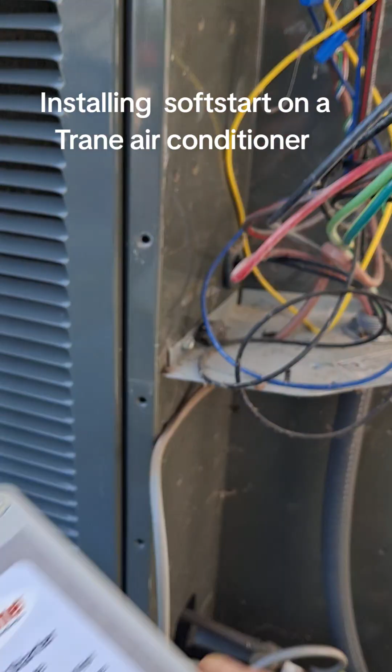So I want to put a soft start on this air conditioner here. I have decided the electrical compartment is big enough to house it. Now the question is, do I want to put it like this or like this? It just depends on what I want to do.

Now, I have that sticky part there. I can just stick it, but anybody that knows anything about sticky stuff being outside in the weather knows that it may not be reliable and it can just go possibly over time. So we're going to also utilize some of the screws it came with.

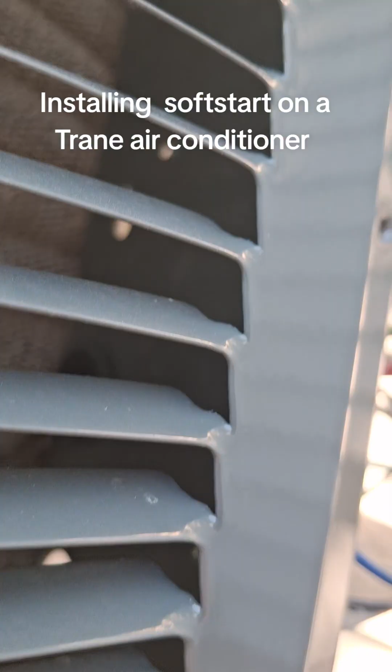But before we start putting screws here or screws here, we're going to stop and take a look inside the cabinet here. Your air conditioner might vary, but we want to make sure before you put screws there are no refrigerant lines or any wires or anything that's in the way. So I don't see any refrigerant lines.

I mean, see the little copper pipes there? Those are going to be refrigerant lines. If you have any of those that are going to be potentially in the way of a screw or rub or touch or something, not a good spot for it. Unless you're competent enough to make sure, if you have a 1-inch space, you don't want to use a 2-inch screw, because you're going to cause problems that will release all the refrigerant, and it's going to be a very costly repair.

So that side looks pretty clear. Let's see what we can see over here. Oh, we see some wires. Okay, so I'm going to do that just to be on the best bet, because it'll be a very big pain to put a screw in a wire. Then you have to do a repair, and it's just going to make the job harder, and we don't want to do that because I'm lazy.

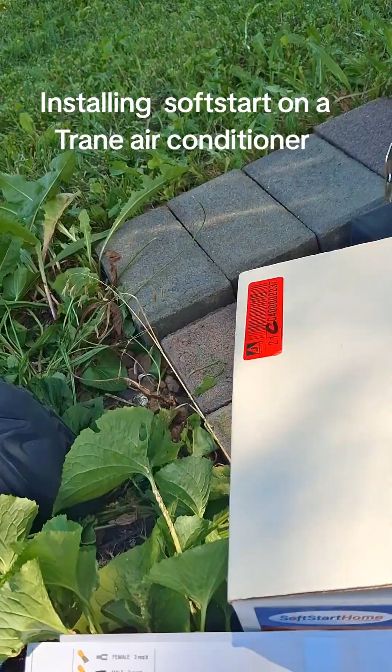All right, before you mess with the wiring, we've pulled the disconnect out. We're going to take our meter and go L1 to L2 and verify you got no electricity to the unit before we start wiring up the unit. Okay, that's all you got to do to verify your power's off.

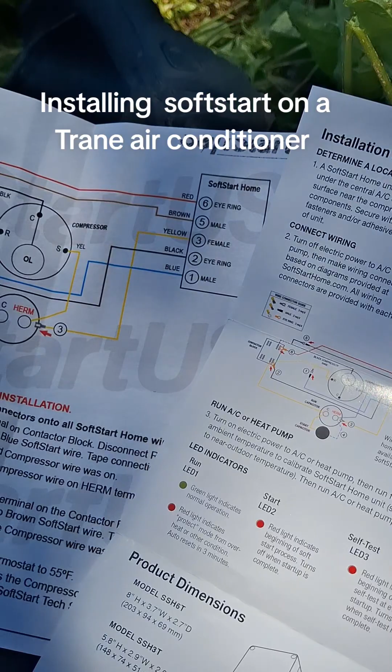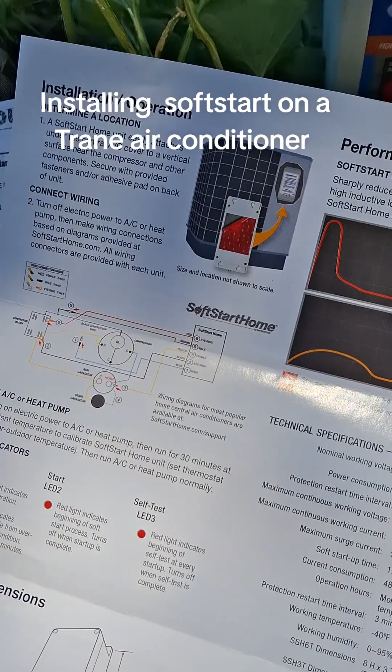Alright, so let's start trying to wire in the soft start here. I got the directions it came with, and I printed up some extra instructions because they do make for more specific wiring on the units to make it easier. So you have your diagram here, your contactor block. The only downfall is it doesn't tell you L1, L2, or your T1, T2s, while these do. So you see you have that portion.

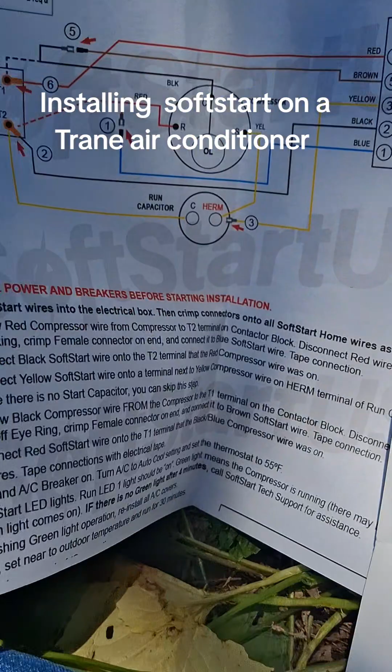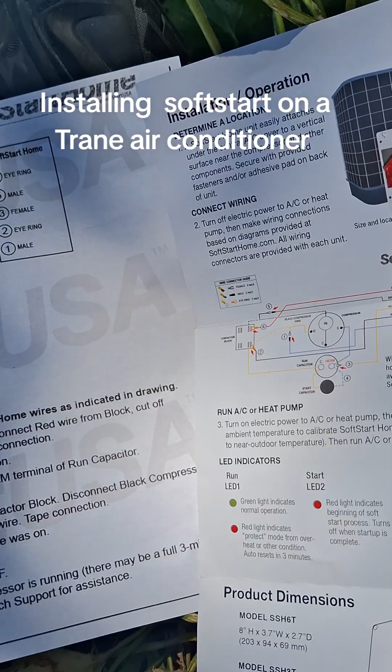Okay, what do the directions say? Follow red compressor wire from compressor to T2 terminal on contactor block. Disconnect red wire from block. Cut off eye ring. Crimp female connector on end. Connect to blue soft start wire. Tape connection. So that's what these are talking about here.

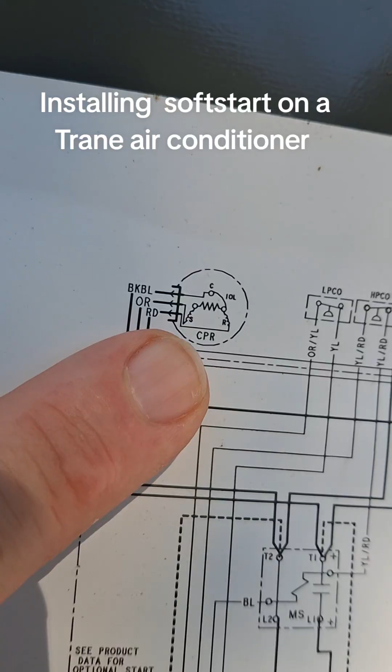Red compressor wire, black compressor wire. So you can verify which is which on your schematic here. So your common's the black, your red is the run, and your orange is going to be the start. Which means on that capacitor, that's going to be the orange wire, and there's your black and reds right there. All you want to do is be careful. Sometimes these like to break if you put too much pressure on them.

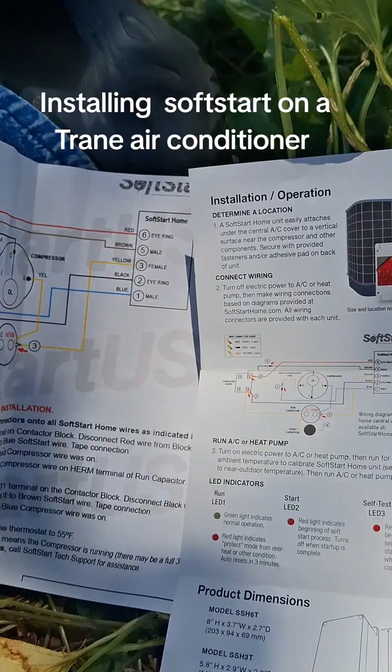Just disconnect that wire. Disconnect that wire. And these pop off just like that. There's those two wires that it was saying to disconnect. These are those little terminals that it's talking about. That's the male one. There's your female one. The male plugs into the female.

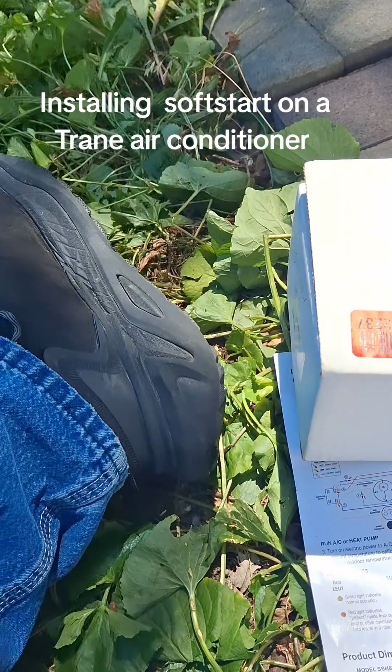So, when doing those terminals, see that little bump out portion there that goes in to crimp down on the terminals? What you want to do is ensure, see that little seam down the middle there? You want that top portion to crush down on this side so it digs into and crimps tight on the wire to make a good connection.

See, you get it to where it crushes in on there and you got a more secure connection and it won't fall off, and it helps hold it on there for a better connection when you ensure that little bump out portion, excuse the focusing, crushes down. When you do it the other way, these things will pop right off all the time. That's the right way to do it.

Now see, I like to take the wire like this before I do the terminal. Let's see if we can do it here. And take it and just kind of pull and twist, because you want to make sure all those are together nice and tight. And when we slide that over there, everything fits and you make a pretty good connection. Okay, so red and black wire from the soft start go up to the terminal side on the contactor. All right, just like we show.

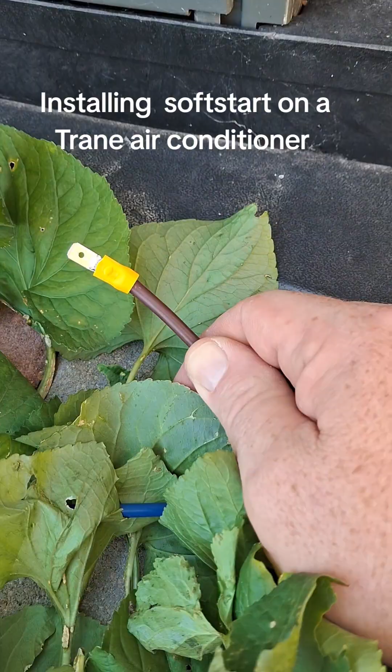Male on brown like it said in directions, male on blue like it said in directions, female on yellow just like it says on the directions there, as we wire this bad boy up. The brown wire will connect to this black wire. There it is. Pardon me, I'm trying to do multiple things at once and I struggle with that. So we got to connect these two together, the brown and black.

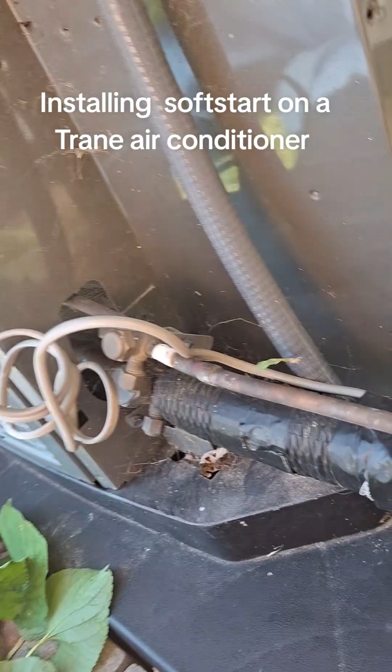Okay, so I went ahead and I've got things wired. You don't need to have me showing how everything goes. So if we look at it here, there's the soft start, there's the equipment. So red and black from there goes to the terminal side of the contactor. Red and black goes there, terminal side of the contactor, okay? The brown wire here connects to the black for a common. So brown and black common, we're going to play with that here in a second on the shrink tubing.

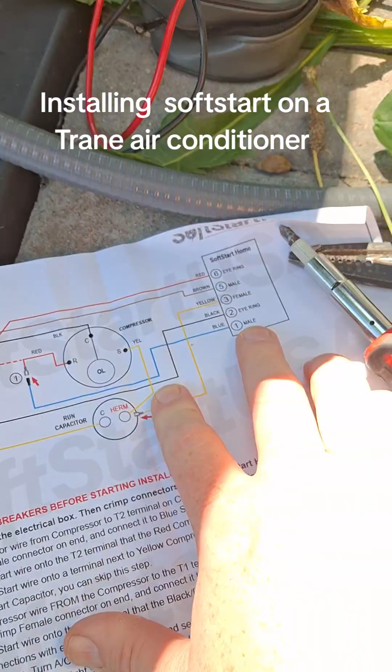Okay, so then what? Blue goes over there to the red for run. Blue goes to the red for run. Yellow connects to the run capacitor for the hermetic side of it. So orange is there. Does it say our hermetic compressor? So that'll be your start portion there.

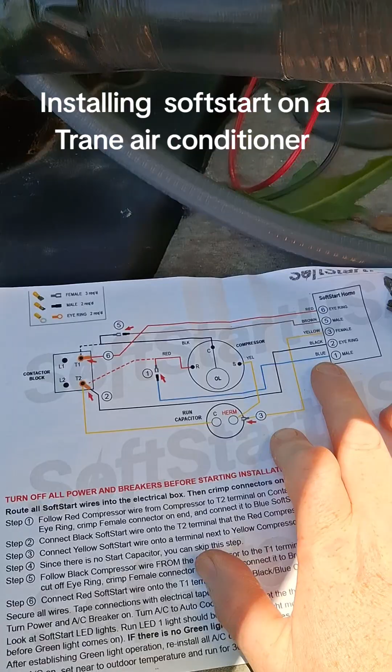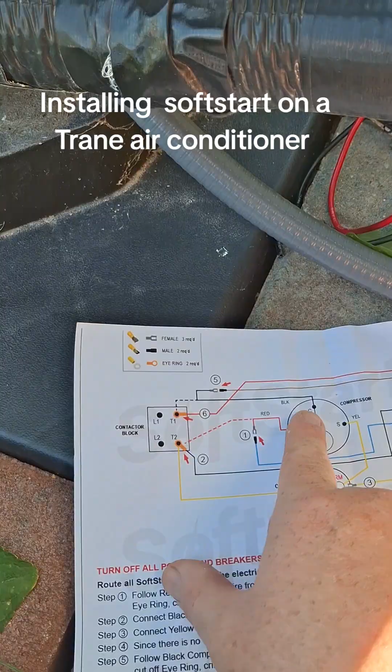And by golly, if we have a blue wired up and a black wired up, right? Blue goes to the red. Black, red go to the contactor. Yellow to the capacitor. Brown goes, where's the brown? Brown goes to common. Red goes to blue. By golly, it looks like we have it all wired up, and we're going to get ready to fire this bad boy up after we take care of a few loose ends.

Just like that. And we've heat shrunk that on there. I'll probably put some electrical tape just to ensure we don't have any shorts or any more problems. Okay, I think we've just about got her all taken care of and we're getting ready to fire it up. I always like to double or triple check wiring. That's how you don't fry components and don't make mistakes.

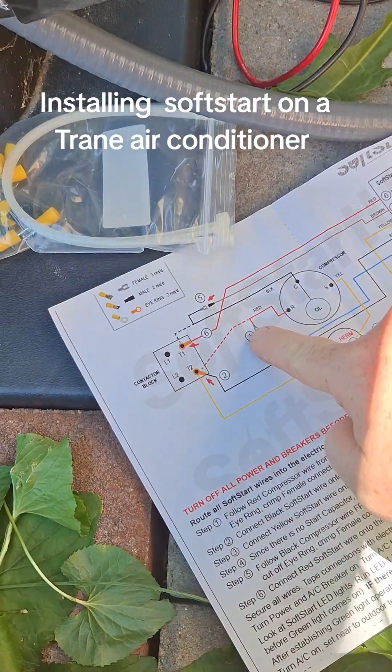So red and black goes to the red and black, red to blue, brown to black, yellow to orange. So that's red, blue, black. All right, by golly, I think everything's covered. We'll go ahead and fire it up before we get all the zip ties in, but we will show you the after results here once we get it ready to go.

All right, the moment of truth. We're gonna do this again. So we got 246 volts testing on the contactor there. And if we're ready, it's either gonna work or smoke. By golly, it did something. All right. So we just made our initial test. I'm gonna get things set up and we're gonna do a full-blown test run to make sure.

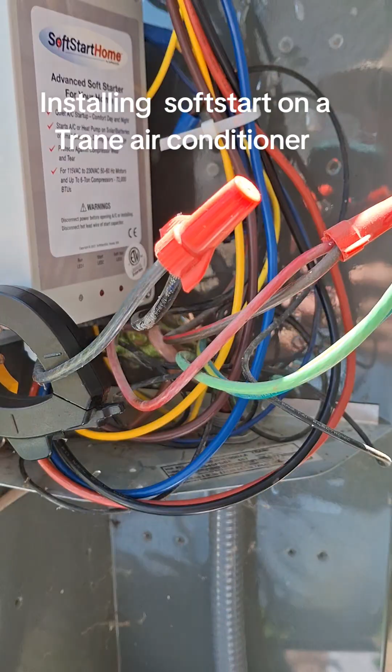All right, just to recap, we still got power off. So, red and black went up here. I did them backwards earlier in the video, but I just want to point out the correction to make sure it works, because I can only do a few functions at once. So talking and wiring are kind of pushing it. So we got it sitting just like that. So that's red and black.

Your blue wire goes to the red compressor wire. The brown wire from the soft start goes to, on the Trane here, the black with the blue stripe. And your orange and your yellow sit on the hermetic compressor like that. So red on T1, black on T2, which is opposite the wire color there. Okay. Common, run, start, and here we go. Let's see what our startup amperage is. All right, here we go.

8 amps. By golly, I say that's pretty good. I didn't see what the peak was there, but we're running at 8, which is a little less than before. We'll review the video and we'll go over the numbers again. So volts times amps. In fact, let's do it this way while it's running there.

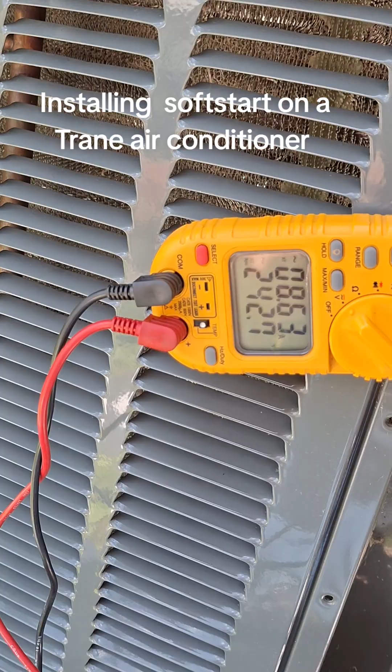Quick follow-up. 23 amps is what it did compared to 29. So we've lowered that amp draw by a little bit, and it looks like by maybe an extra half a second. So maybe we'll see some energy savings. 242 volts, 8 amps. Volts times amps will give you that run wattage right there.

So hopefully this video gave you some help on soft starts and kind of how to wire one and how much amperage they do drop. Because if you drop that amperage and wattage, now you're more ready for a generator, and you also won't have the lights dim in your house.